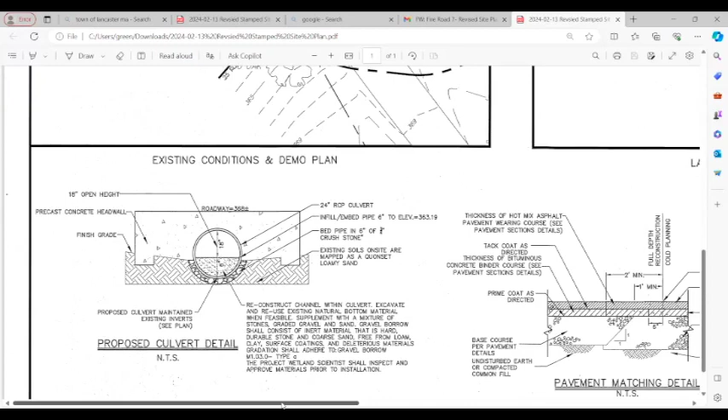So if the commissioners don't have any questions, I'd be happy to take a motion to close the hearing and issue the order of conditions. I'll make a motion to close the hearing. I'll second, Dennis. All right, motion's been made by Bruce and seconded by Dennis to close the hearing. Any further discussion? Hearing none, this will be a roll call vote.

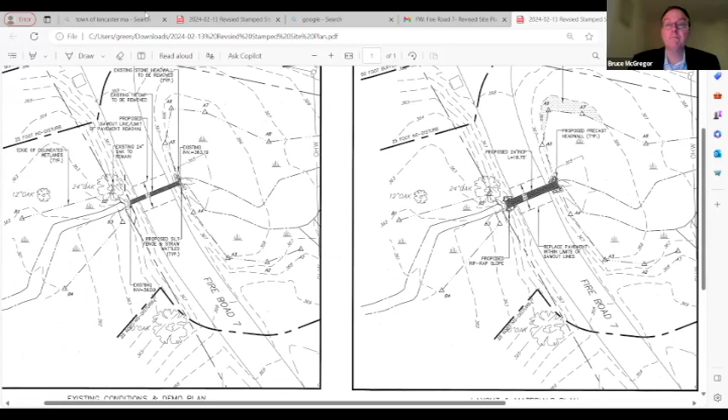Any further discussion? Seeing none, this will be a roll call vote. Bruce McGregor. Aye. Dennis Hubbard. Aye. Jim LaValle. Aye. And Tom Seidenberg also votes aye.

All right, thank you, Larry. Awesome, thank you. Enjoy your night. You too.

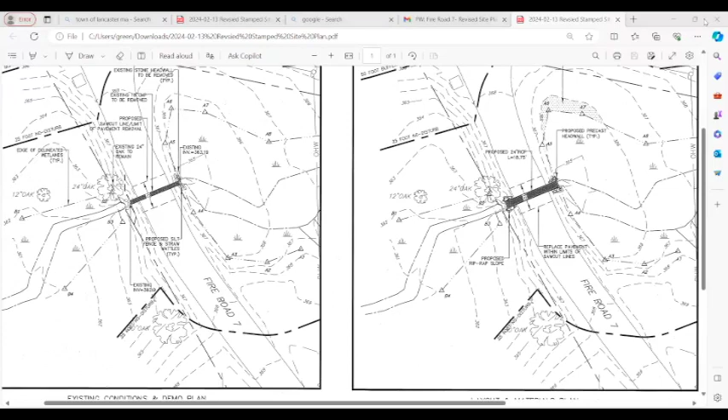Next up on our agenda is a continued notice of intent hearing for 35 Holiday Lane. Mr. Collette, I see you on the call. Want to give us an update?

Yeah, hi everybody, Jonathan Collette with Haley Ward. I will share my screen and pull up the plan. Can everybody see that? I should do that, right? Yep, we can see that.

Okay, so the only thing that has changed on the proposed plan since the last meeting is the filter trench on the left side of the garage was pulled back out of the 25-foot buffer zone. Sorry, for some reason I can't see what I'm sharing, but yeah, that was the only thing that has changed on the site plan since the last meeting.

Okay. So we had talked the other day, and I had told you that we had reached out to town counsel about the problem with the previous notice of intent. I had expected to receive a letter from counsel before this meeting, but that didn't occur. So I think it's kind of up in the air in some sense about how we should proceed with incorporating the violation into this notice of intent.

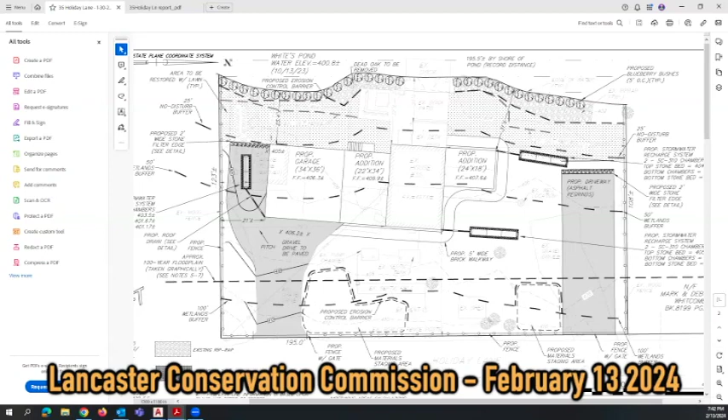I thought when we dealt with the previous order and the restorations, we had put the plantings in. So shouldn't they be proposed, and shouldn't they be in by now? I guess this gets back to, is this covering everything we did before or is this going forward? But I thought the plan we approved this summer had the replantings there. Am I wrong there?

No, it did, and I'm to check them this spring to see that they've taken hold. They're the ones that I gave Dominic during the fall to put in amongst the riprap. And we did do the plantings. The site visit didn't see them, but I just want to confirm, so we're going to check them in the spring to make sure they're there. Yes.

Okay, thanks Dennis, is that it? Yeah, I guess that's it for now. Just to let everybody know, the plantings, it was just like a root that I had, and I couldn't guarantee if they're going to last or hold up. That was of the dogwood.

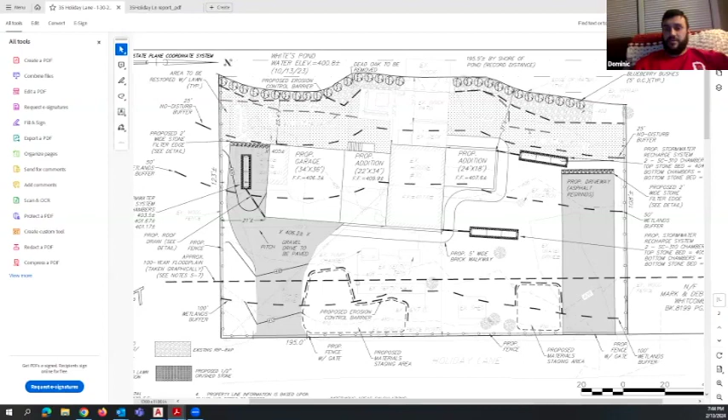Okay, thanks Mr. Arsenal. Dennis, you still have your hand up, do you have more comments? Nope, just didn't put it down, apologize. Okay.

So I think, Jonathan, I'd like to have a continuance so we can get the information from town counsel. Are you open to asking for a continuance? Yeah, I'd like to ask for a continuance. Tom, I think you had mentioned when you get that letter you would be sending it to me also, correct? That's correct. Okay, I'll be looking out for it then. Yep.

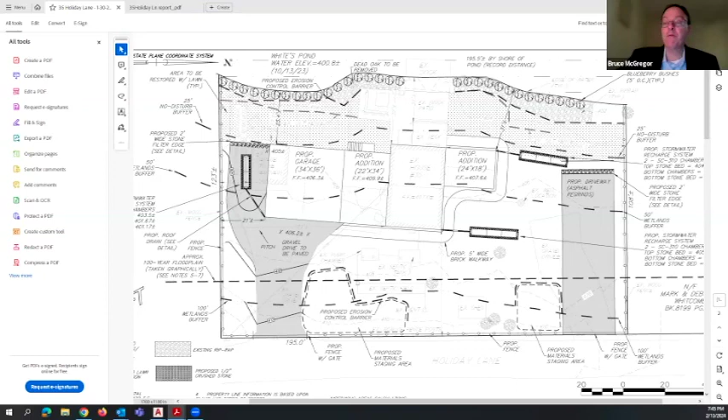Continuance to the 27th is okay? Yep, okay, I'll make a motion to continue to the 27th. I'll second. Motion's been made by Bruce, seconded by Dennis, to continue to the 27th. Any further discussion? This will be a roll call vote. Bruce McGregor, aye. Dennis Hubbard, aye. Jim LaValle, aye. And Tom Seidenberg also votes aye. Thank you, let's see, thank you guys.

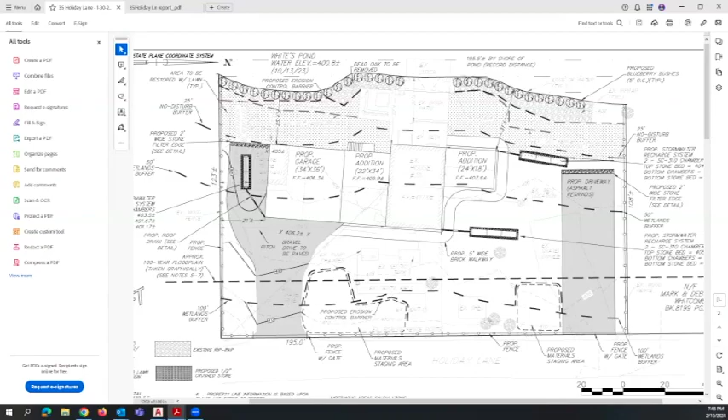Next on our agenda, we have a continued notice of intent for Liggett Road box culvert repair. I believe Zygmunt, you are on the call. Good evening, this is Hope Olszewski, I'm the environmental chief at Fort Devens.

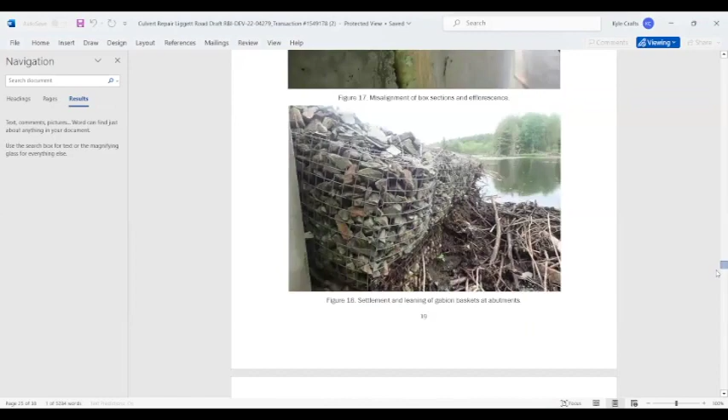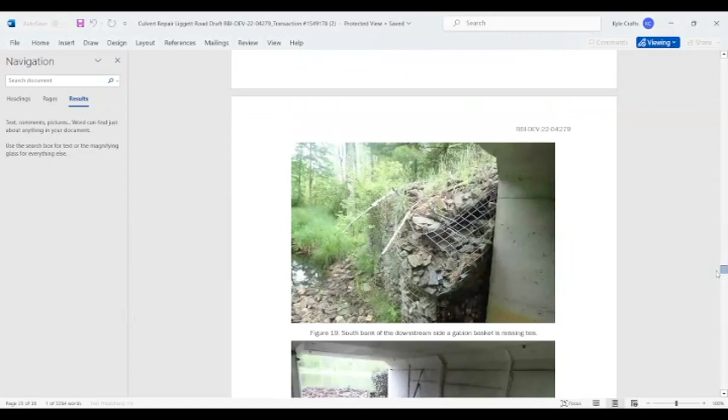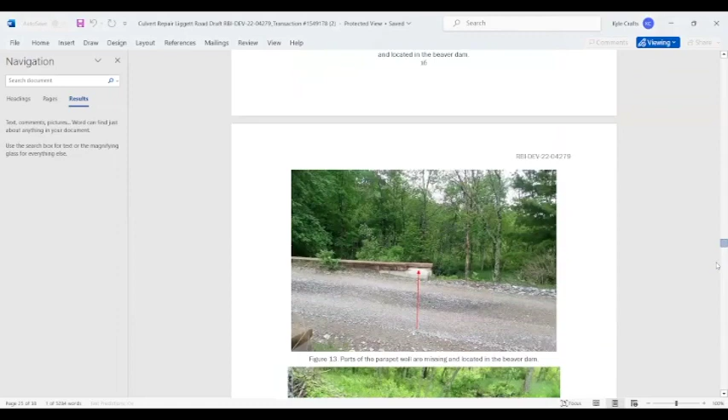So I have the pictures. Was there an engineering drawing with this? Yeah, there's like it's not like a full on. Let me see. See if I can find it. Yeah, it's just like a sketch. Okay. This was in August, you said? Okay, I didn't go back far enough.

Oh, it's a Word doc. Okay, that's okay. Okay, I do have this. Yes, I have this document you're sharing.

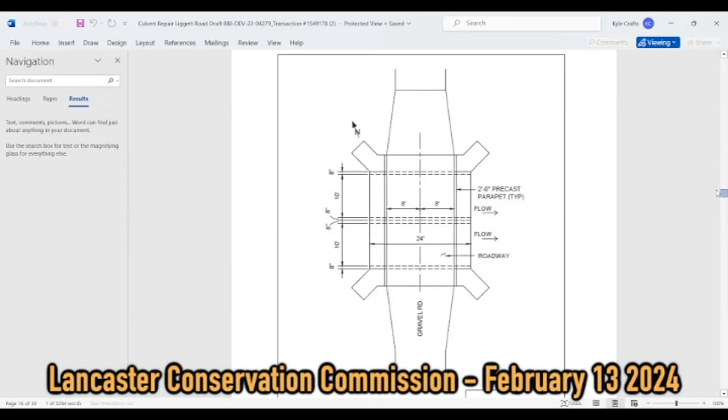So in light of the letter and the fact that we already have this document, commissioners, are you comfortable closing and issuing an order of conditions? I'd be happy to talk about the special conditions that we might put in there to specify some of what's in the letter that we received today. That would potentially get us out of the catch-22. I'm also more than willing, once we do have a new plan, to submit that as part of the order of conditions to be reviewed prior to work start, if that helps.

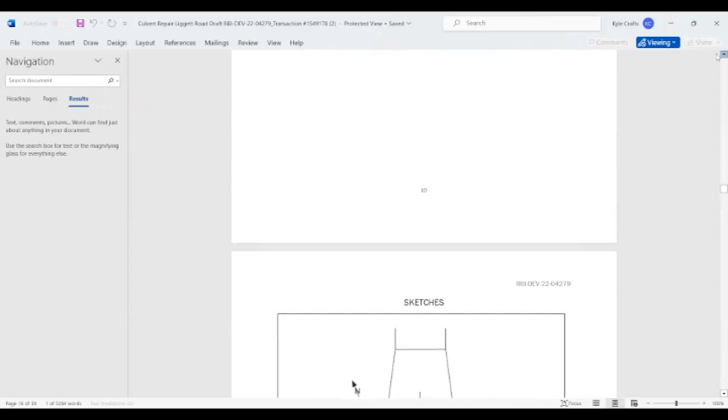So in the past, the commission has gone back and forth on whether we would accept plans after the fact. I think we've recently had discussions about how that's not a good practice, and so I don't think that the commission is inclined to issue an order of conditions without a plan. I think that the letter and some special conditions would be sufficient. However, I want to hear from the other commissioners to see how they feel about that.

Bruce, you have your hand up. I'm comfortable with the plan that they've got plus the letter.

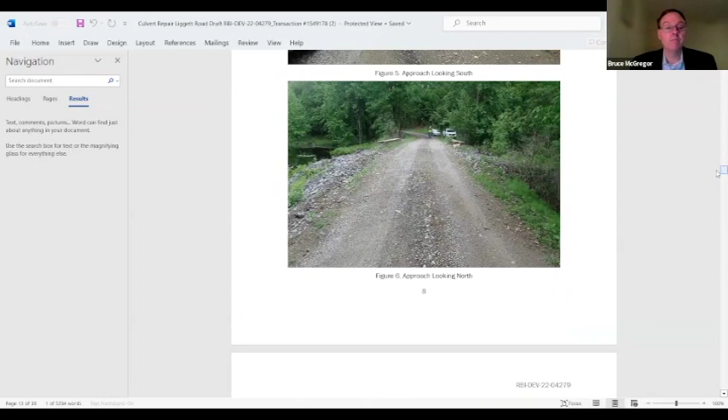Any other comments from commissioners? Go ahead, Jim. So I'm okay with it too. I think we should spend a moment discussing what the special conditions would be.

Yep, sounds good. Happy to hear any offerings. So I think simply saying what's already said in the letter, that the beaver dam would be protected and left undisturbed, that may be a sufficient condition. That's pretty broad. I don't know if there are additional conditions that folks would like to add.

So is that the only change, that the beaver dam is left untouched? Yeah, from the original discussion, correct. Okay.

Sean, you've got your hand raised. Real quick, has the Board of Health signed in regards to the beaver dam? So the beaver dam won't be removed, so there's really no need to sign on. This is on the Army base, so it's not really affecting anything. I don't know if that answers your question, Sean. Well, it does. I just want to sort of make sure that we're dotting our I's.

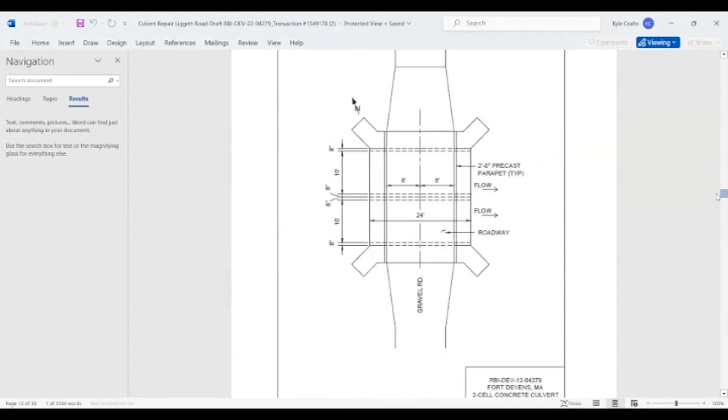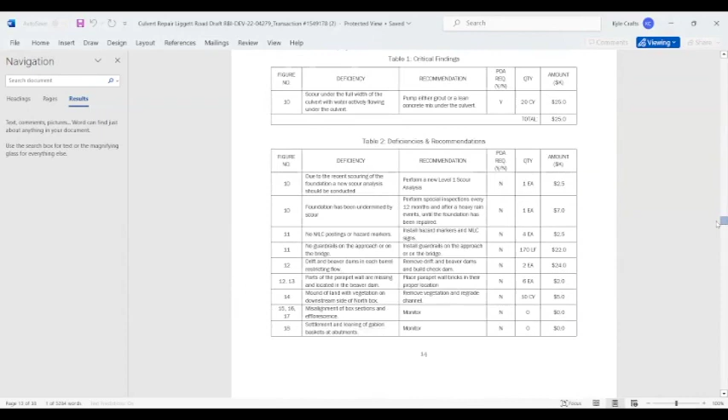Okay, thanks, Sean. Any other discussion, commissioners? Any comments from the general public on this? Not seeing any, so I'd be happy to take a motion to close the hearing and a motion to issue the order. If I can do a combined one, I'll make that motion.

So we haven't ever done combined before. I'd prefer that we just do them separately. So motion is made to close the hearing. Do we have a second? Seconded. All right. Any further discussion?

Roll call vote. Jim LaValle. Aye. Sean Windsor. Aye. Bruce McGregor. Aye. Dennis Hubbard. Dennis, you're on mute. Dennis. Oh, actually, I see now that Dennis is not at his chair. Okay, Dennis is no vote or abstain.

Now I'd be happy to take a motion to issue an order of conditions with a special condition for protecting the beaver dam. I'll make that motion.

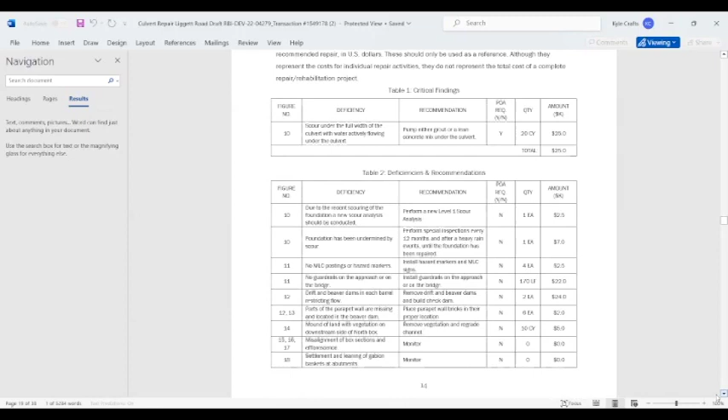Yeah, second it. All right, motion's been made and seconded. Any further motion's been made by Sean, seconded by Jim. Any further discussion?

All right, this will be a roll call vote. Bruce McGregor. Aye. Jim LaValle. Aye. Sean Windsor. Aye. Dennis Hubbard is not at the computer. And Tom Seidenberg also votes aye. Okay.

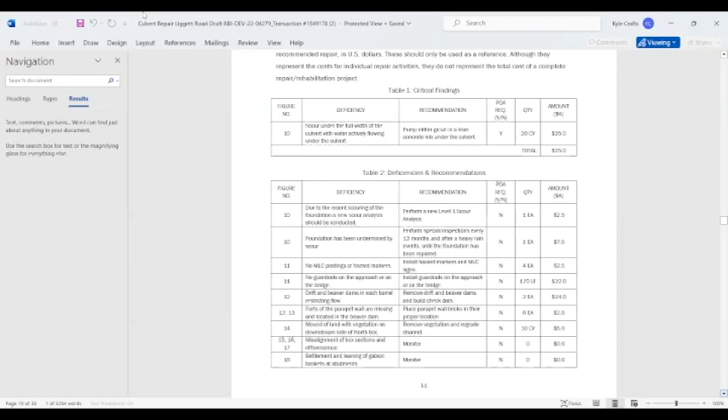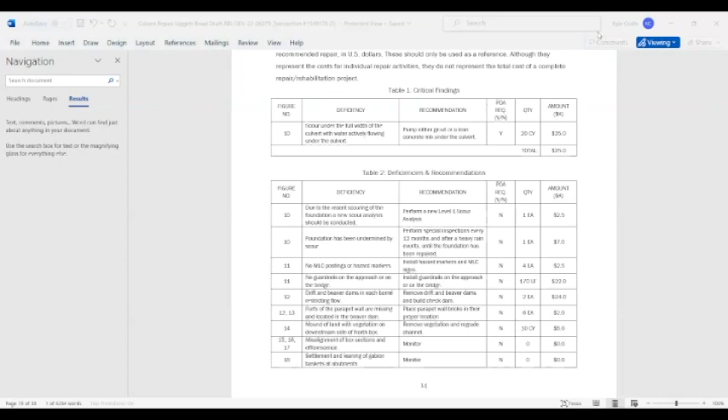Next on our agenda, we have a notice of intent for McGovern Boulevard construction of roadway extension, associated cul-de-sac, retaining walls, utilities, and stormwater management.

Let me read the notice into the record. Is this the right one? Yes, this is the right one. Town of Lancaster Conservation Commission Notice of Public Hearing, February 13th, 2024.

Pursuant to Mass General Laws, Chapter 131, Section 40, the Wetlands Protection Act, and the Lancaster Wetlands Protection Bylaw, the Town of Lancaster Conservation Commission will hold a public hearing via Zoom on February 13th, 2024 at 7 p.m. to hear and act upon the following matter.

A notice of intent filed by William DePietri of 702 LLC, located at 295 Turnpike Road, Suite 100, Southborough, Mass., applicant and property owner, relative to the construction of two proposed lots, a roadway extension, an associated cul-de-sac, retaining walls, utilities, and a stormwater management area.

The property is located at McGovern Boulevard, Lancaster, Mass., and is identified as Assessor's Map 8, Parcel 45, and Assessor's Map 14, Parcel 4D. Copy of the application and accompanying documents are on file at the Office of Community Development and Planning, 701 Main Street, Lancaster, Mass., 978-365-3326, extension 1059. Right, who do we have on the call to present us this project?

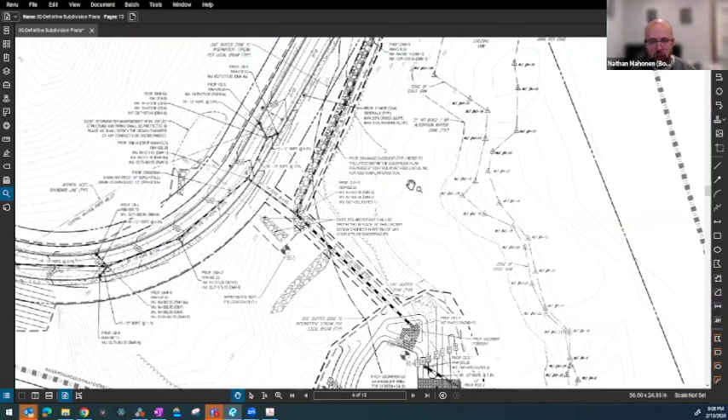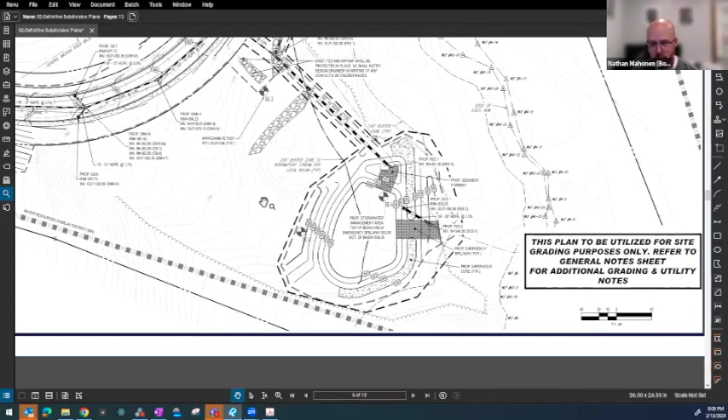Correct. So the stormwater management for the roadway will be collected by a series of catch basins with deep sump, conveyed into a new forebay in this location, and then discharge into an infiltration basin. The outlet discharges southeast of the proposed roadway towards the wetland system. The work and discharge here is outside the 100-foot buffer. It is inside the 200-foot intermittent stream buffer under the local bylaw and within the ACEC, as you mentioned. But this area is all previously disturbed, cut open, and currently used as temporary sediment basins from the old gravel operation that was there. So we're looking to repurpose this previously disturbed area for the new stormwater management system.

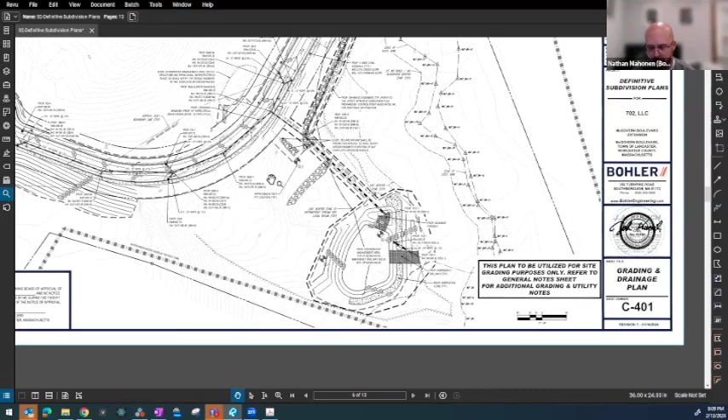I see. Okay, and what kind of maintenance will be required on this basin? Basin maintenance is usually biannual for the most part. There are some more frequent maintenance requirements for cutting and pruning and making sure you have proper access to get into the basin. Those are all outlined in the operation and maintenance plan submitted with the drainage analysis and are in compliance with DEP state standards. Okay, all right, thank you.

Commissioners, any other questions, comments? Nathan, so just to confirm, the initial portion of this road is essentially the same exact layout as before, all the way up to where the cul-de-sac used to be, right? Correct. Is that correct, right here? Correct.

And then just to confirm what I think I see on the plan, there's two catch basins near the bottom of the hill. Yeah, pretty much where your mouse is. Those convey the stormwater all the way to the basin at the bottom of the plan, is that correct? Correct, this is the conveyance route into the basin. So we're capturing everything from the connection to the existing roadway, piping it against grade to get to the existing basin. But there is a substantial drop off from the roadway down to this corner, so there's sufficient elevation and distance to get it there with appropriate conveyance and treatment.

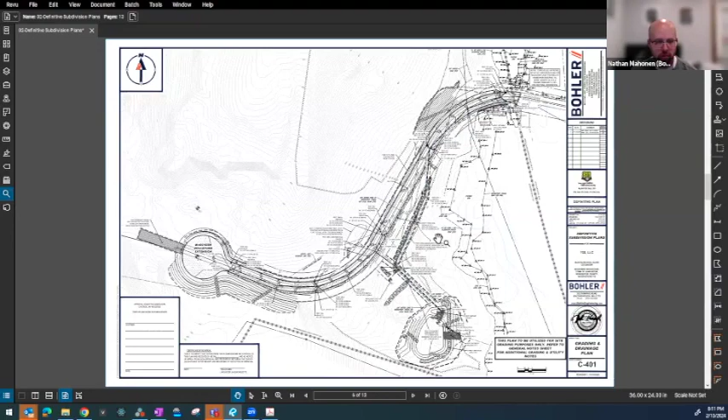And the limit of work is marked on the plan. It's not entirely clear to me. It ends pretty much right on the other side of the culvert there at the stream. Sorry, the other end. Yeah, it ends right on the other side as you get the pavement connection and saw cut. You need to saw cut out an existing portion to tie it in and connect the two pavement sections together.

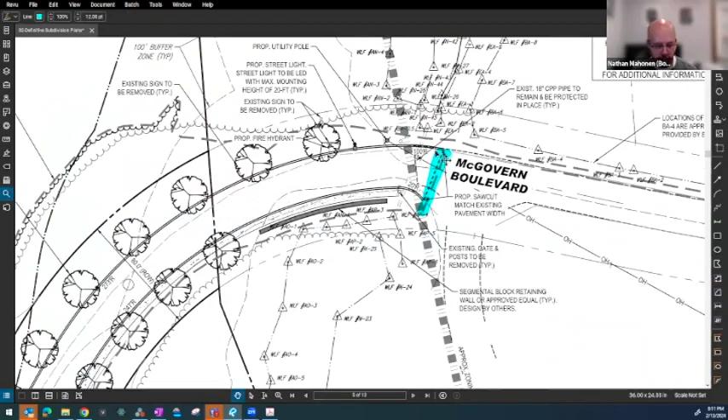And just to confirm, the road, there's an existing order of conditions. Is there an existing order of conditions for that road on that side? For McGovern? Yeah, I know there's an existing order of conditions for the stream crossing over McGovern Brook. Correct.

600 feet to the east. My question is, the paving here for McGovern, just east of this limit of work, is there or is there not an order for that? Was that incorporated in the stream crossing work? I have a vague recollection that roadway extended to the beginning where you have the limit of work on this plan, but I'm not positive. I'd asked Bob DePietri if he can chime in on his recollection as to what might have been permitted under the previous design for the crossing, if it included anything relative to the extent of the rest of existing McGovern Boulevard.

Yes, Nathan. There's an existing order of conditions on McGovern Boulevard from the 702 land out to Lunenburg Road, and that's under North Lancaster LLC. Okay, thanks.

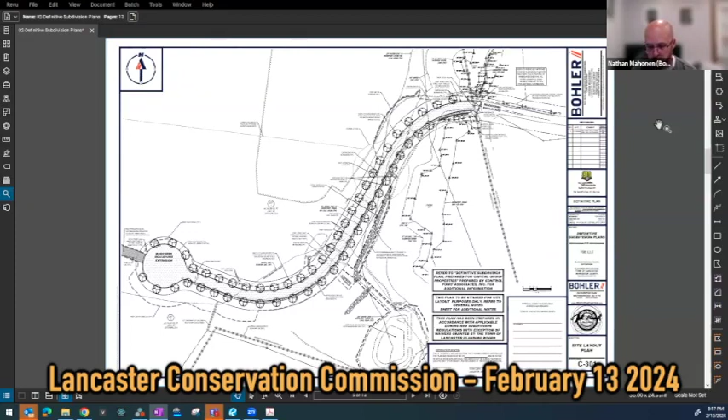And we are happy to copy the commission on the response to Haley and Ward, so we can send it directly to you rather than going through the board if that's easier. Sure, well, it all goes to the office, so. Yeah, we'll make sure you get separate copies directly. Thanks.

Commissioners, any further comments or questions? Are there any comments or questions from the general public? Not seeing anything.

So I assume you'll be asking for a continuance. Do you want it to the next meeting or farther out? I don't know how long it's going to take the town to engage. We could certainly do it to the next meeting, and if the consultant isn't lined up for review, we'd be happy to look at an alternate date at that time. Okay, sounds fair. Yeah, I don't think a peer review would be at least received and available for review by both the applicant and the commission in time for the next meeting.

Maybe the first meeting in March, perhaps. Yeah, if we want to give some adequate time and buffer in there, the applicant is not in a rush to get this approved in one meeting or two meetings. So we do have time on our end. If we want to say the second meeting in March, I think that would be appropriate and hopefully give us enough time to review any comments that come in and respond accordingly.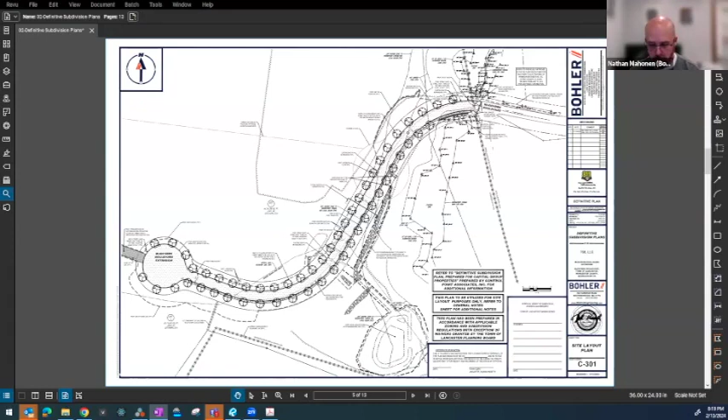Okay, so I believe that's March 26th. Let me just confirm on an actual calendar. Oh, no. Yeah, March 26th is the fourth Tuesday in March.

Is that acceptable? Yes. All right, so I'd be happy to take a motion. I'll make a motion for continuance to March 26th. I'll second it. All right, so Bruce has made a motion to continue to the 26th, Sean has seconded.

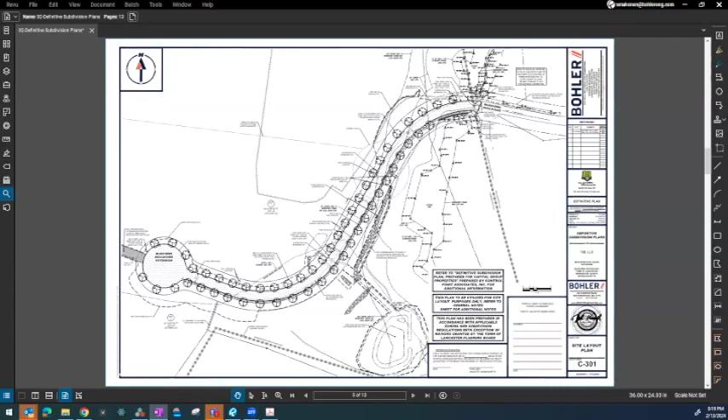Any further discussion? This will be a roll call vote. Bruce McGregor, aye. Jim LaValle, aye. Sean Windsor, aye. Dennis Hubbard, aye. Tom Seidenberg also votes aye. Okay, thank you everyone, thank you very much for your time.

Apologize for having to step away during that last hearing. Had a little dog emergency I had to take care of. It's okay, life happens.

Okay, let's see, next up on our agenda we have ratify sign enforcement order for 2038 Lunenburg Road. I believe we have Attorney Campobasso on the line. Yes, I'm here, thank you.

Thank you, so why don't we just get the ratification out of the way? So I think, commissioners, you saw the enforcement order come out a few weeks ago. If there's no objection, I'd be happy to take a motion to ratify. If you want discussion prior to that, I'd be happy to have a little bit of discussion, and then we can talk about it, we'll get an update about the status of the site.

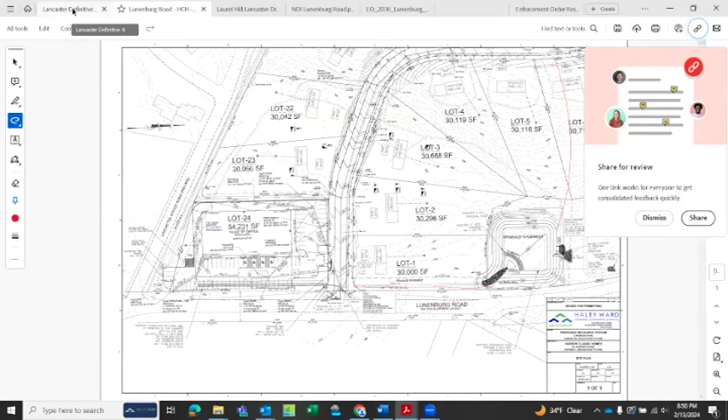It seems like the claim is that it's just overland - maybe the channel that was eroded into the side at lot 2, which would be on the southern side of the basin. I think north is... to the left, yeah. So I guess I could believe there was a large amount of water coming in there, and if it really was not ponding in this detention basin, I guess I can understand. But not having seen it, I'm having a little difficulty squaring that with the future conditions where now all those catch basins are in fact collecting all the water. Isn't that going to be an awful lot more water? So now I'm less certain that I understand what the solutions are.

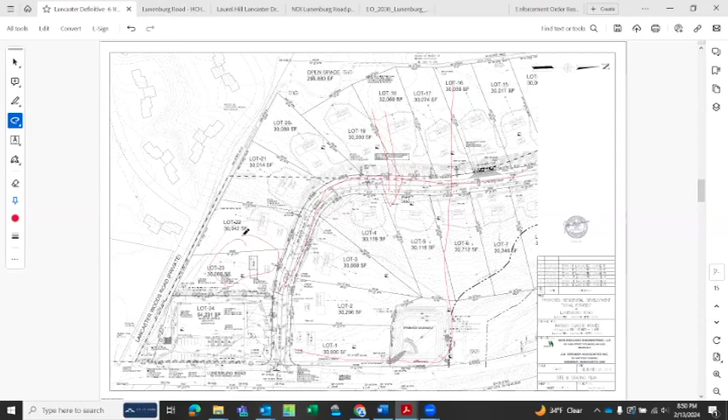Well, the solution - we need to get the site stable, and that really... Sure, all right, let me answer two questions. Understand - so the amount of water getting to the basin now, because the road's not fully operational, is that we're getting a lot more water coming down this way, because the street's not cutting anything off. So we're seeing a lot more water coming into the basin. Once the street is operational, you'll get all the water above the street going to a temporary basin over here, and then really the only water that will go to the basin afterwards is anything above it, which would be this area here.

And so by what we were looking at - we were out there the day of the storm and the day afterwards when we were opening some of the structures to look at some of the other stuff. So we looked at the pipe coming into the basin. The pipe coming into the basin is as clean as you would see a pipe at this point in the construction.

The only sediment we found was a little bit at the flared end, which we know was there from before the basin was constructed. But the pipe itself was very, very clean.

The sediment that looks like it's getting into the basin is from the area just from these slopes because it's not all stabilized. So really, if we can get as much of the water away from the basin so that it doesn't keep picking up sediment in the basin, that's what we're trying to do.

We're trying to not eliminate, but cut off as much water as we can that's supposed to be going into the basin once the road is live, or really what's going in there now. So by putting it in that temporary basin, getting the road live, and then getting the water to go this way, we stabilize the basin and get everything growing during the spring. That's really what we need to do ideally.

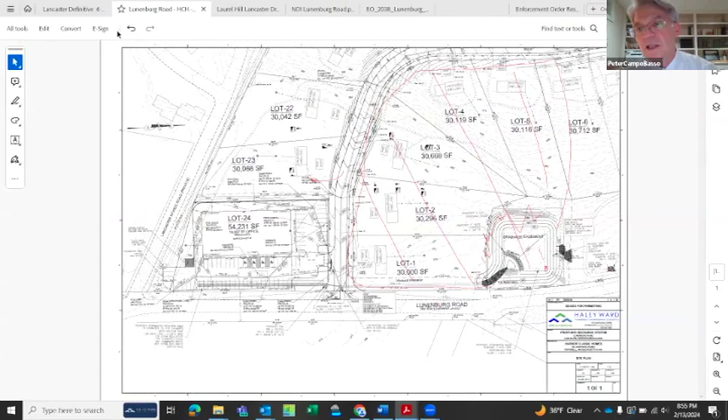Yeah, I understand the problem we find ourselves in is in part due to the season it was constructed, and that part I get. So I'm just, Wes, I'm also noticing something else while looking at the pictures.

I was trying to see the forebay again, to see if I had a picture of water running in there. I don't have that, but now looking at this picture, I'm noticing there's significantly less trees than shown on the plan you're sharing with us. I'd say the angle isn't exactly ideal for this comparison, but I'll state that the plan shows lot 4 as mostly forested, while I'd say from this picture lot 4 is mostly bare.

So my question to you would be: was the stormwater management plan created with the amount of forest shown on this plan?

I'll have to take a look. Let me see if I can find the document. What we typically do for this type of development is use a general runoff number based on the lot size — for a residential lot being three-quarters of an acre, that number takes the whole lot as lawn and house, a percentage of impervious surface. Usually that number is conservative in nature, but I can double check that. I didn't do the calcs for this, so I'll have to check with the person who did.

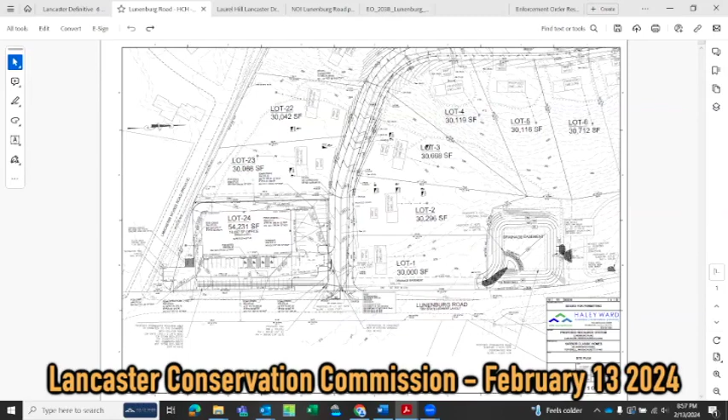I can get that answer for you. Part of the reason I'm asking is because that is a pretty steep slope there, right? That's where the hill rises. You can see that slope on lot 4 in this picture I'm looking at, happy to share it. I think it was in the set of pictures Brian took as part of the enforcement order. That was just an observation I was making as we were having this discussion.

So I think that's it for my comments. Commissioners, any more comments or questions?

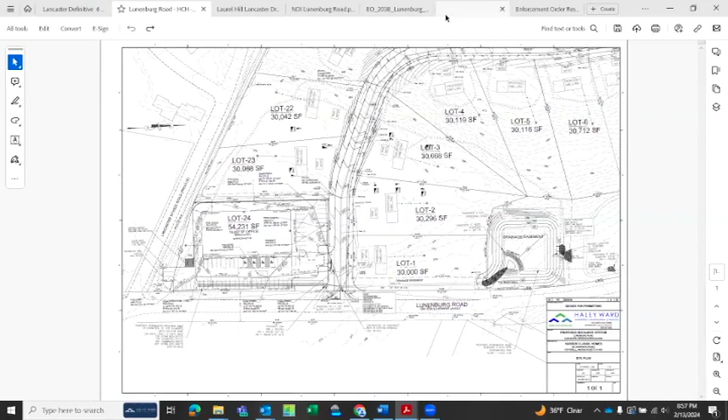So I think Attorney Campobasso, the next step is you'll be coming back with a restoration plan. We're hoping to see that in 60 days.

Yes, if the commission likes, you can keep this on the agenda. If you want us to report back in 30 days to give you a status, we can do that.

I'm sure we're still waiting for DEP, but we did make the contact as I stated. I have made contact with Thomas Rabula. He does have everything regarding the notice of intent filing, so we're still waiting on that as well. But I can stay in touch with Brian or yourself as far as when we retain the wetland scientist and when we anticipate the restoration plan. If you want us to appear again, we'll do that, or once we have it, we can decide to present it.

I think we can play that by ear. I don't feel the need to put a date on a calendar at this time. Brian, you've got your hand up.

Yeah, sure. So for Peter and Wesley, just for clarification, on the resolution to the enforcement order now, what is the role of the construction of the road? Do you need to be working on this road? Do you need to have it graded? Do you need to have a binder coat for this diversion of water to go away from the basin?